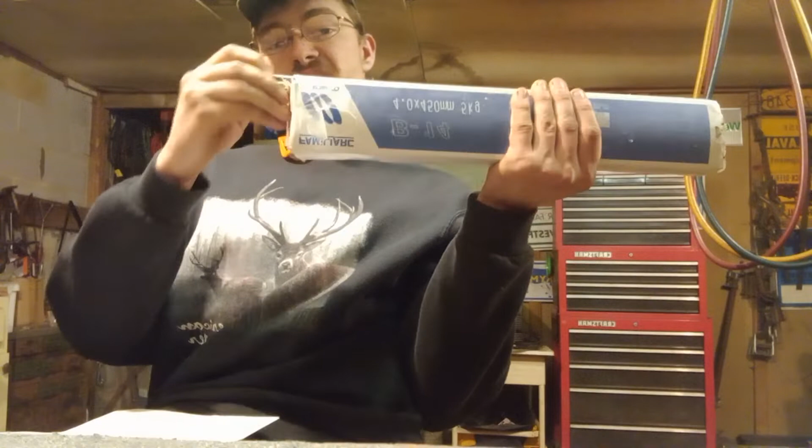It's 5/32 in diameter, which is what is this? It's upside down, whatever. It's 4.0 by 450 millimeter rod, 5 kilograms of that. The coloring tip on that is like a peach sort of color. Right there. Not a lot of information on the box, but that's what I have this paper for.

Let's see. Features. Suitable for butt and fillet welding of thin and medium thick plates up to 20 millimeters. Excellent usability. Welding consists of 2G, 4G, 2F, 1F, 1G, and 3G uphill.

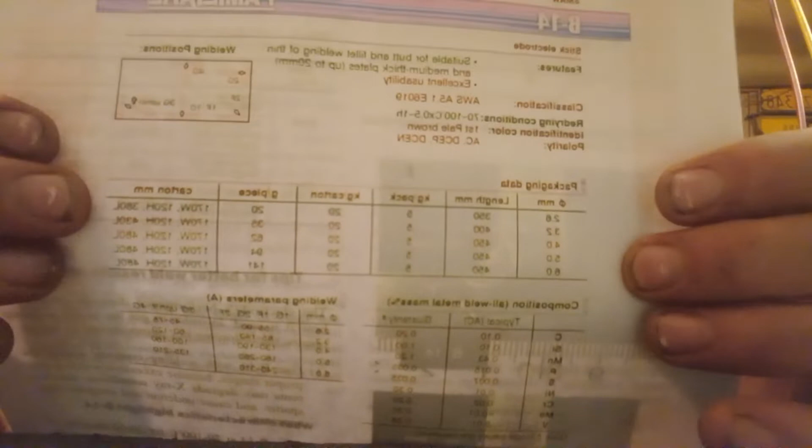And the packaging data, I will show you that instead of trying to read all that off, because this is the second take and I will be more than happy to show you this. That's all the packaging data for the size of the rod, millimeter, its length, and all that other fun stuff. Instead of trying to read all that off, I'd rather get to the fun stuff.

Composition of all metal masses, and I don't remember some of the elements of the periodic table abbreviations. Like, I don't remember what P is. S, tin? No. I see carbon, silicon, manganese, 2 I forget, nickel, chrome, molybdenum, and vanadium. So that is those right there. I'm just trying to get this for here.

Welding parameters in amps. A 2 millimeter rod, 2.6 actually, and the 1G, 1F, 2G, and 2F, remember those positions, which I would say 1G through 2F, you just fill in the blank, runs at 55 to 90 amps, 3G and 4G is 45 to 75.

3.2 millimeter rod, and the 1G through 2F is 85 to 140 amps, and 3G to 4G is 60 to 120. 4 millimeter rod is 130 to 190 in the 1G through 2F, and 3G to 4G is 100 to 160. 5 millimeter rod is 180 to 260 amps, and the 3G to 4G is 135 to 210.

6 millimeter rods, 240 to 310 amps in the 1G through 2F, but there's no data available for the 3G and 4G category. All weld mechanical properties. I don't know a lot about megapascals and joules, so I'll just show that to you.

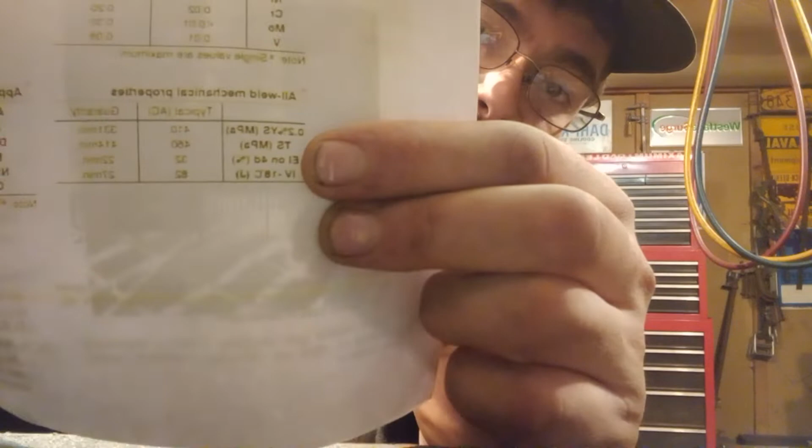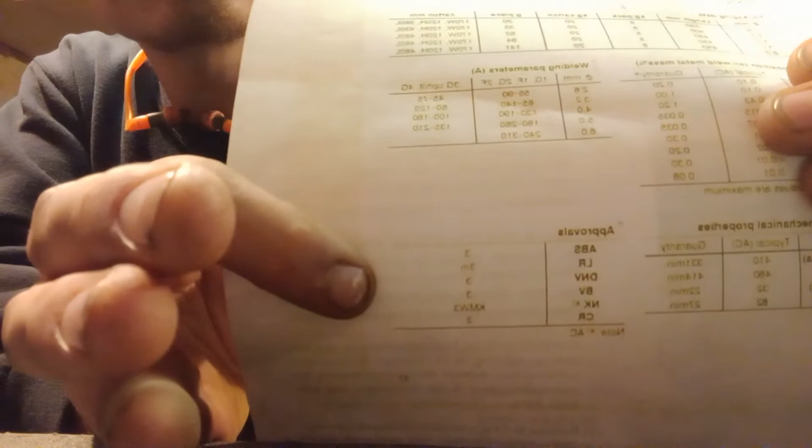Another thing, approvals, ABS 3, LR 3M, DNV 3, BV 3, NK, KMW3. Yeah, I don't know what that means. I was printing this out last night. I should probably know what that means, but hey, I'm still learning. So there's that for you.

Now we can do the good stuff that the average layman can understand, and we don't need to have, well, it would be nice to have an education to know the stuff, or even if you're self-taught, that's nice. So I really should do that. But, keeping it basic, tips for better weld results with the B-14. The electrode performance depends greatly on how it is used. In order to get better welding results, the following key points should be noted.

Use the B-14 with welding currents within the proper ranges, because excessive welding currents may degrade X-ray soundness, increase spatter, and cause undercut and irregular bead appearance.

My mouth is dry. Redry the B-14 at 70 to 100 Celsius for 30 to 60 minutes if the electrode picked up excessive moisture. This is because excessive moisture in the coating may degrade the electrode's usability and cause the occurrence of pits in the weld metal.

Avoid excessive high temperatures and long time in redrying B-14, because the excessive redrying may damage the coating, causing less penetration, poor X-ray soundness, and electrode burn.

Because the B-14 is a non-low hydrogen type electrode, medium to thick mild steel work should be preheated at an appropriate temperature and kept during welding at a proper interpass temperature. Let's see.

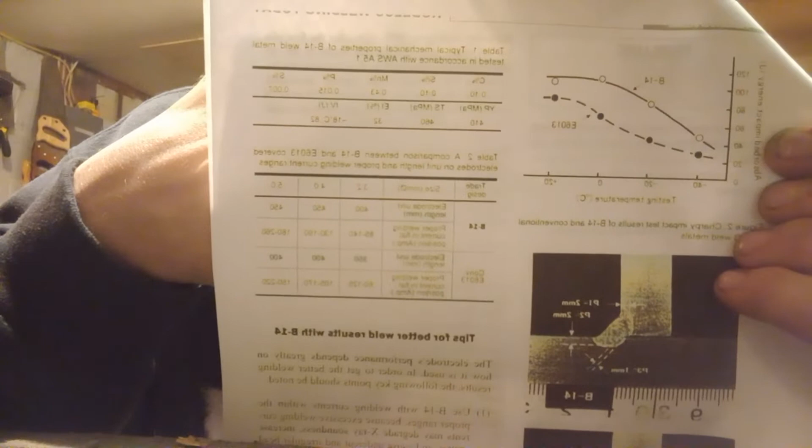So I will show you those, because the 6019, from what I've gathered from actually talking online on a welding forum to a person who uses them, they're like glorified 6013, and they use just 3 different kinds of them. So hold my hand back to that if you want to pause that to read that. I think that's focused. Right. But there's those.

Or I suppose I could read them to you. Be a lot of numbers. Might be difficult to follow, but size in millimeters. The B-14 3.2 is 400 millimeters long. 4 is 450, and the 5 is 450. Proper welding current in flat welding position. Amperage is 85 to 140 for the 3.2, 130 to 190 for the 4, and 180 to 260 for the 5.

And conventional E6013, this comparison. They're 350 millimeter long 6013. 3.2 millimeters is 60 to 125. 4 millimeter 6013 is 105 to 170. And 5 millimeter that is 400 millimeters long is 150 to 220. So the E6013 has lower running temperatures than the B-14.

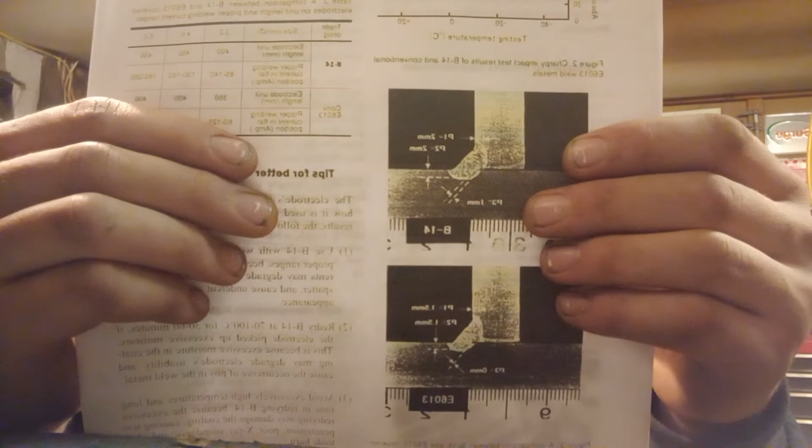In Figure 2, Charpy impact test results of the B-14 and conventional E6013 weld metals. So you can see, looks like the 6019 B-14 has a better bead profile there and more penetration to the base metal than the E6013.

Ooh, history. Now we get to learn about it. Familiar with B-14, AWS A5.1 E6019. B-14 is versatile. I think there's ilmenite. Is there something ilmenite? ILME.

B-14 is versatile ilmenite type covered electrode for mild steel, offering unsurpassed usability and weldability in all positions but in fillet welding and welding sheet metal and medium thick up to 20 millimeter plates. Yes, ilmenite. Okay, interesting. A history of ilmenite type electrodes.

Kobelco developed in 1942 an epoch-making ilmenite type covered electrode, B-17, which used ilmenite, there we have a definition, a composition of iron oxide and titanium dioxide as a raw material for the major part of the coating flux. After a period of years, Kobelco developed other ilmenite type covered electrodes, B10 and B14, so as to satisfy the requirements of a variety of users.